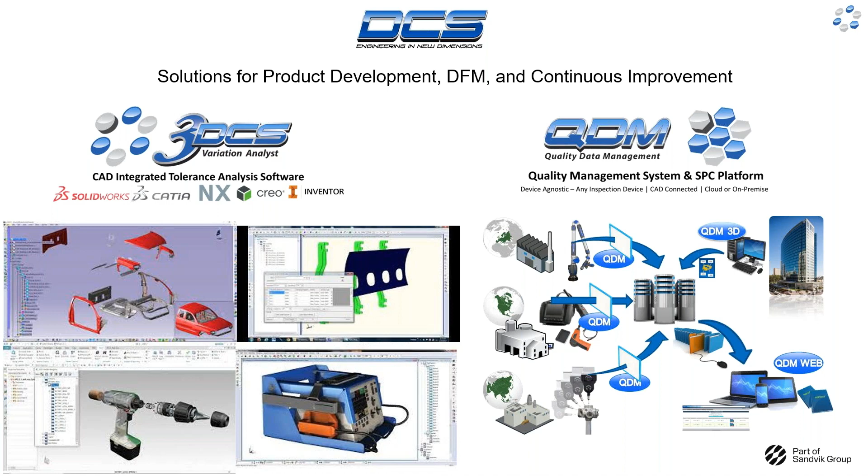We are focused on our place in Industry 4.0. The objective of Industry 4.0 is to combine existing technologies, CAD, PLM, QMS, with emerging technologies, 3DCS, for example, to make operational efficiency gains across engineering. The fundamental underpinning or digital seed of Industry 4.0 is the geometric dimensioning and tolerancing. For most companies, that currently resides on the drawing.

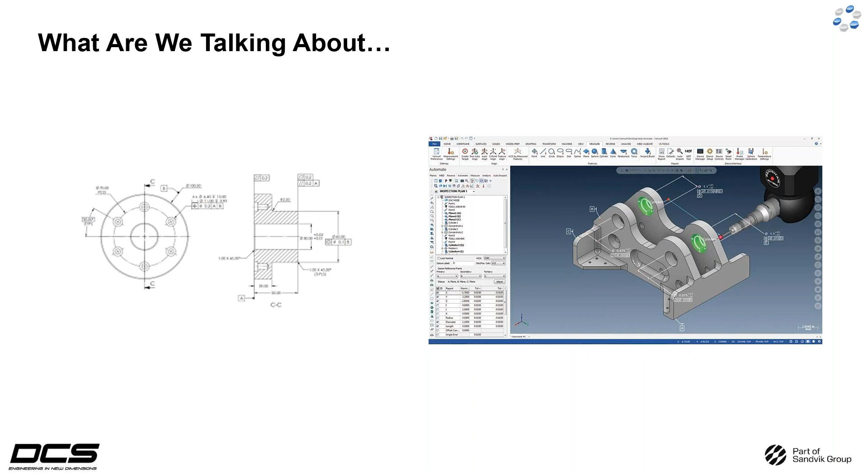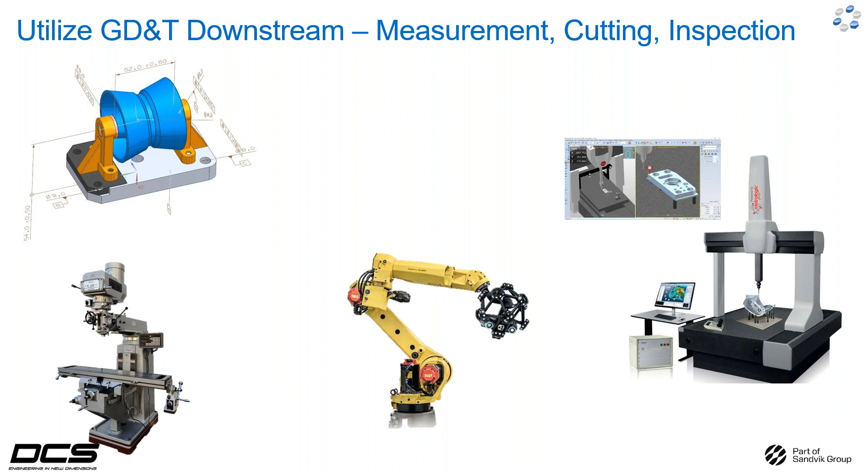But all major CAD systems now allow you to embed this 3D GD&T as a semantic feature in the CAD model. The more important element here is that now the GD&T is a machine readable and reusable file. So other elements in every manufacturing business will take advantage of it. Inspection, machining, robotics. This leads to operational efficiency gains right out of the gate.

Here's the old school, right? We design it, we've got to engineer it. We spend a lot of time, money, and effort with really smart people to get to a physical build. And we go back and forth before we get to launch so that we can validate and verify our design is going to meet quality requirements.

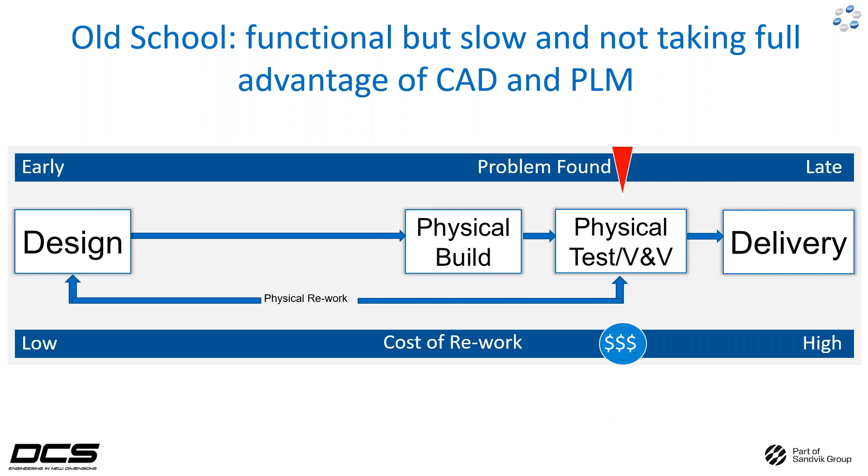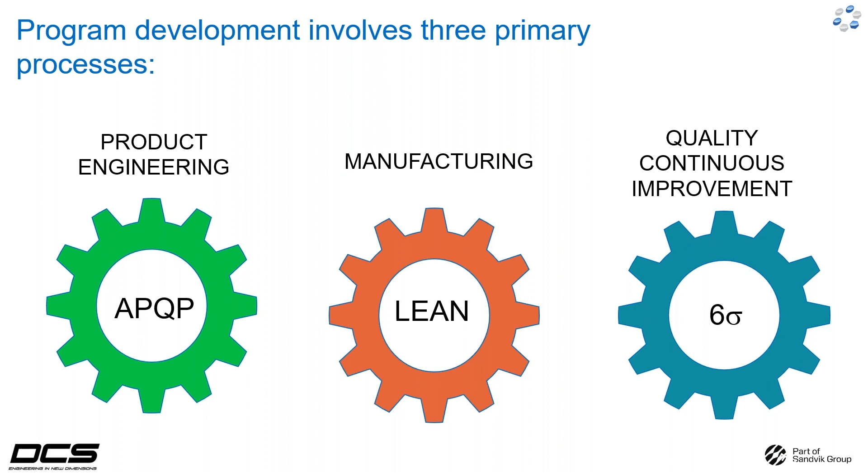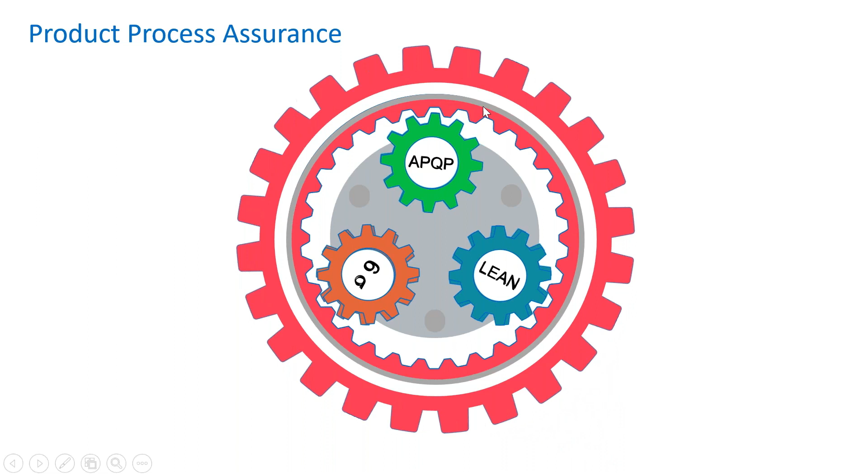And those fundamental efforts take place, but today, a little bit autonomously, a little bit separately, and the line of communication between those efforts is often slow and delayed. The program is going to go, but there can often be delay when it comes to the data that comes out of these efforts.

But now, with the Dimensional Engineer's Toolbox from your CAD desktop, you can make datum strategies digitally. You can benchmark your design before you cut any parts. You can optimize fixture locators without math data of the fixture. You can simulate multiple build scenarios. This puts you in a position to go to your launch with plan B, C, and D for the build, along with a mitigation plan should issues crop up in the launch.

We want to collect data to make decisions. Get data from suppliers. Make them validate parts before they ship. And start to thread the language of manufacturing, GD&T, through your teams. This will be the fastest way for communication across these efforts.

Now, with dimensional engineering in the middle of the effort, now those APQP, lean manufacturing, and quality teams are all in sync. And more importantly, they're all in sync with the program. When the program needs data, they can go to the system and get it today, not tomorrow after a decision needed to be made.

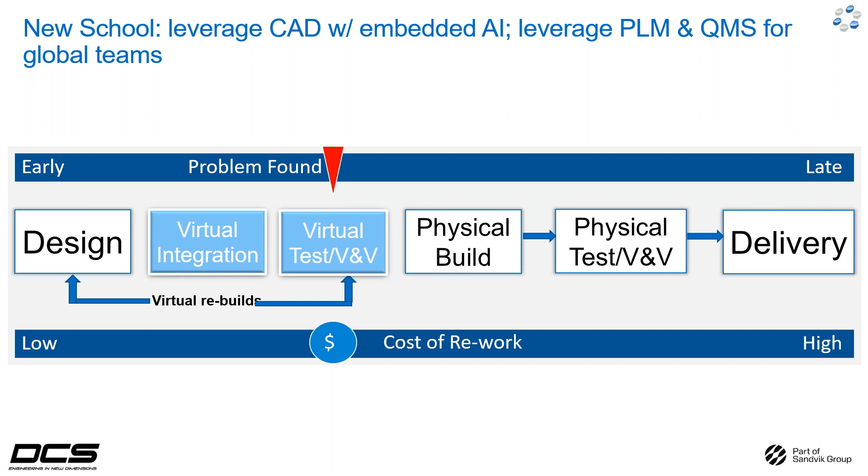The new school will have you apply artificial intelligence in its purest form at the front end. Make decisions, create machine readable GD&T that can be shared. And so now we go to the build faster than ever before. We are making engineering decisions 2 to 3 times faster than ever before. We still have to get to a build, that's obvious, but do so much faster and a lot less expensively.

Sikorsky has been building helicopters for over 90 years. For all that time, they would get to a point in the build schedule after all the engineering effort, all of the tooling, all of the design effort, supplier quality assurance. They would get to the point in the build schedule when they wanted to locate the transmission to the structure. They knew it would be 2 weeks to make the adjustments required to both install and make functional that very complex interface.

With 3DCS, Sikorsky told ASME, the American Society of Mechanical Engineers, they do all of that in 1 day. They used the saved time to make decisions on other elements of the program. That's why we like to say, simulate the build before you build. There's a lot of money to be made.

3DCS has an entire platform for dimensional engineering. Our flagship product is Variation Analyst, full-blown Monte Carlo, all kinds of distribution options, all kinds of move types. Variation Analyst is the platform to support our add-ons, advanced capabilities that allow us to use FEA data, stiffness matrices, transformation matrices, to go really deep on builds of complex assemblies.

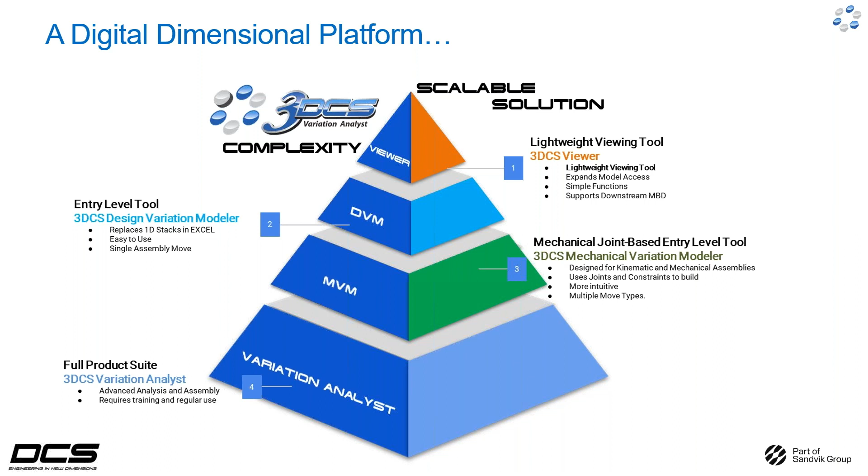We also go the other way. We also go with an entry-level tool called Design Variation Modeler. Instead of doing 1D, worst case and RSS stacks in Excel, like you might currently be doing, do 3D worst case and RSS stacks from your CAD desktop.

We asked 1,000 customers, what's the big deal? Where's the money? They told us time and again, when we do 3DCS during a digital phase of development, we reduce engineering change through the entire life cycle. When we use 3DCS to support metrology in their problem-solving requirements, we've found it to expedite that process by 50 to 60% time reduction. And we go to the launch now with multiple build scenarios and a mitigation plan. We go to the build in a proactive position, not a reactive one.

We've got to tell 3DCS what is the part, how does it locate to other parts, what is the tolerance of the part. We can use a linear dimensional tolerance. We prefer the geometric dimensioning and tolerancing. What are we measuring? I need the gap and flush to be plus or minus a millimeter. Analysis, the ability to do multiple builds extremely quickly, and then evaluation. What are the sensitivities in this design to a measurement? What is most and least sensitive to my measurement?

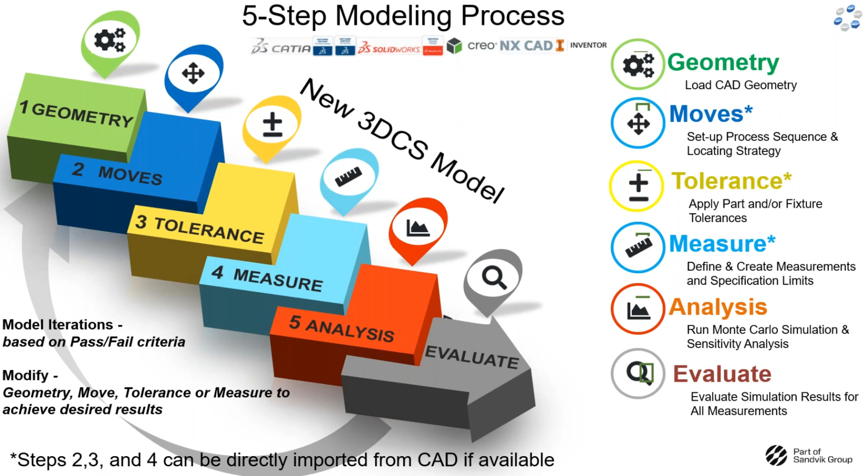And then finally, we have to define what it is we want to measure from a dimensional standpoint. Gaps, flushes, interference, circular clearances. So those measurements, anywhere you write a measurement, we will collect data and tell you whether or not you're going to be within your specification and all the tolerances that affected that measurement. So there's basically 3 main inputs: moves, tolerances, and measures. And once those are input, then you run the analysis and evaluate the results.

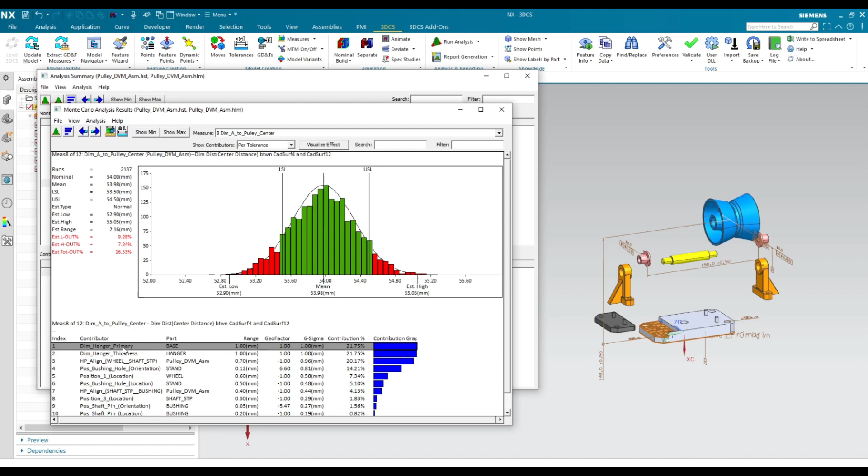If the results are out of spec, you have the option to modify tolerances, modify your location method, modify the design altogether. This is all done within the CAD system before we start actually cutting any physical parts. So the goal is to analyze your design and improve it, or at least catch as many problems as you can before you start making physical parts.

So with that, I'm going to jump over to NX. And from here, you can see I have a little pulley assembly. I'm running NX, and when our software is installed, we are just another ribbon.

So you can see there's 3DCS NX, and you can go to assemblies or PMI or any of the other NX functions. And when you do your tolerance analysis, you just come to our workbench. When you come to our workbench, there's going to be a DCS tree, which is associated with the NX tree. So you can see as I click through, it highlights the parts in the NX tree as well as in the 3DCS tree.

And then this is where all of our data will reside: moves, tolerances, and measures. This model, you can see, has embedded constraints. So we're going to utilize those to directly assemble this model. And if I take this base and open it into a new window, you can also see that these parts

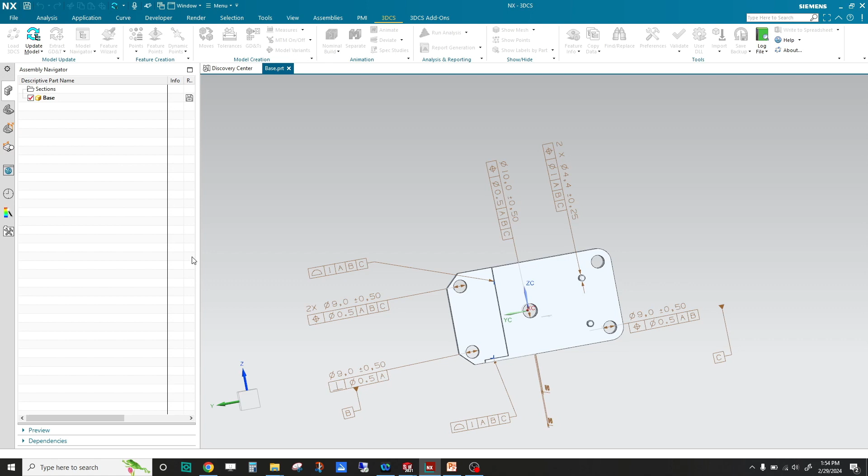have embedded PMI. So remember, you don't have to have all this stuff embedded, but the idea is that as we move more and more into model-based definition, we want as much data tied into the CAD as possible. And then what you're seeing here is assembly GD&T. So we're going to use those for our measurements.

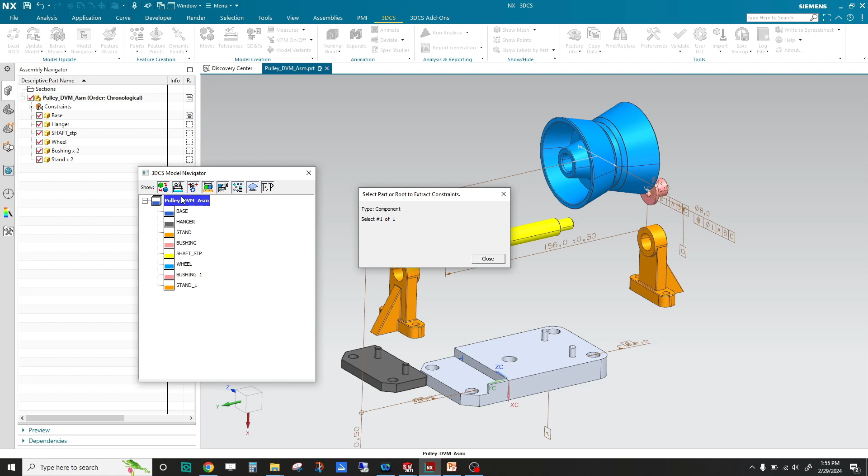So because we have all this embedded, I can come up here and say, hey, I want to extract my moves. Well, hold on a second. I gotta get my tree back. You can see how this is all empty at the moment. And if I say extract moves, parts have to be fully loaded. It created 7 moves from the 18 constraints I showed you earlier.

So if I come in here, now you can see I have these moves, and you can see how it's highlighting the features that were automatically picked up from the constraints. And now I can build this. I can separate it, and I can actually animate it through the assembly sequence, so you can see how this is put together.

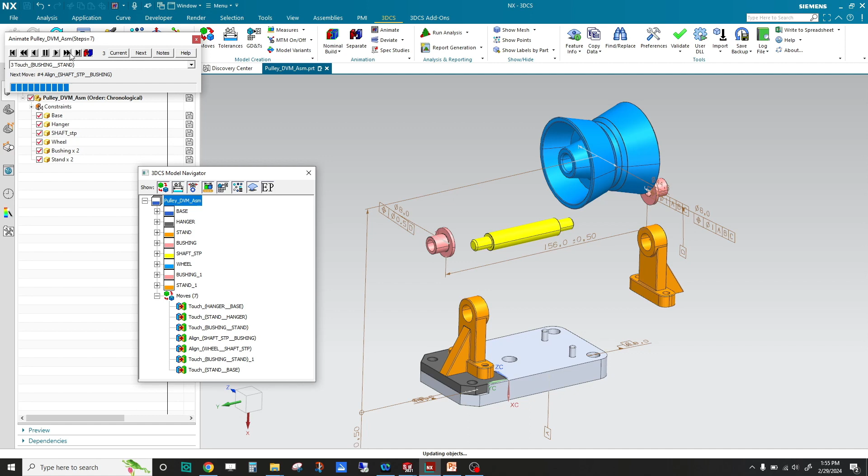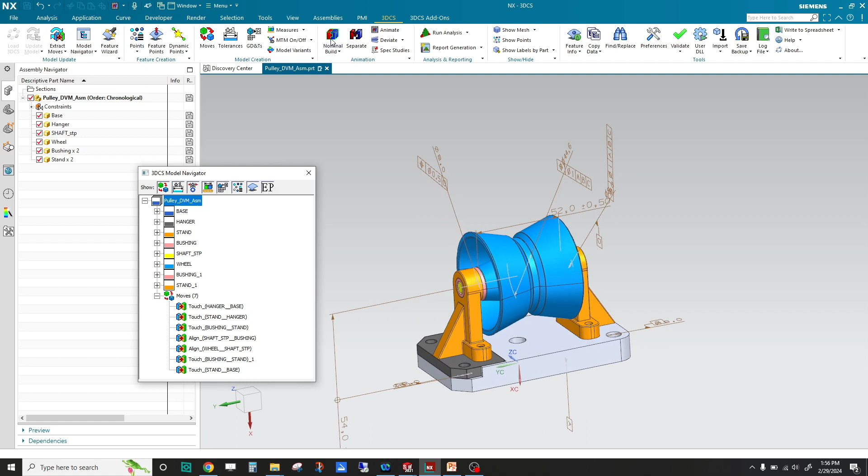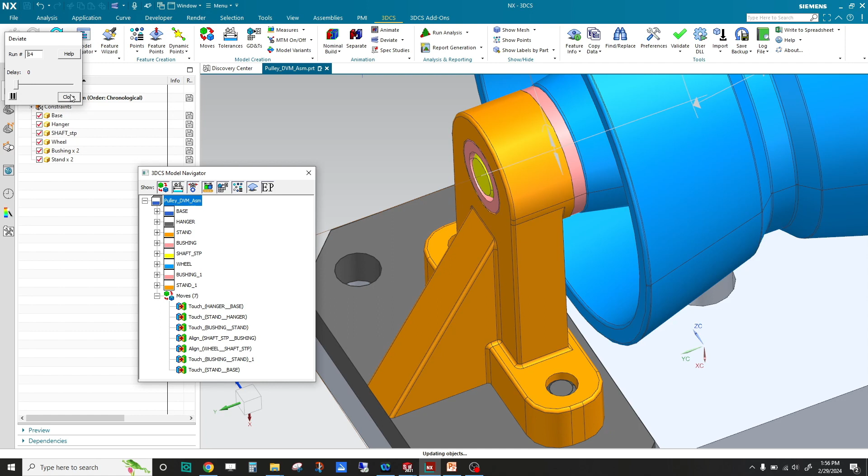Now that it's built, I have not brought in any tolerances, but from the design, if I zoom in here and I hit deviate, you can see these parts are jiggling around. This is variation picked up just from the original design because the pins are smaller than the holes. So there's inherent variation in a product just from design clearances.

Now if I separate this model and we look at the base, you can see it's got some features. These were the features that are used in the moves, but there's no tolerances. So now I'm going to come up here and extract GD&T on all the parts. And you can see it pulled in 17 GD&T callouts. So now you can see from the tree, we have all kinds of GD&T.

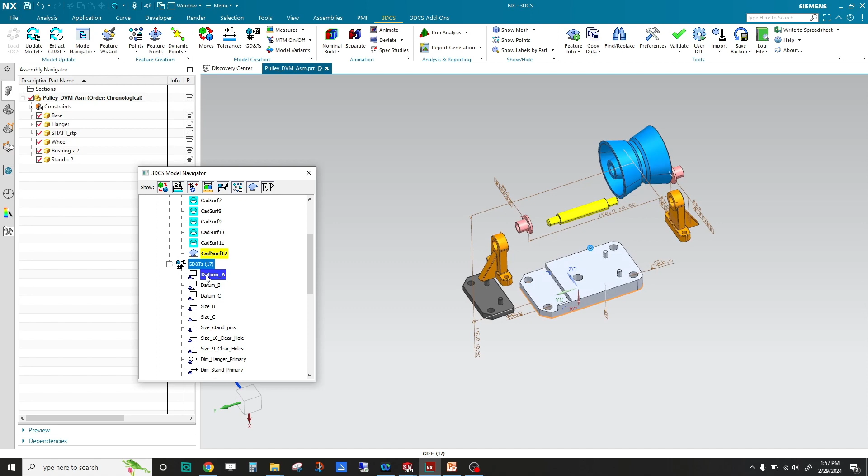I'm going to double click this. I'll do a quick auto sort so I can mouse over, and you can see on this base it's highlighting that's datum A, that hole is datum B, datum C, and if I come down here, profile tolerance on that surface, profile tolerance on this surface, and so forth. So all the parts are now toleranced.

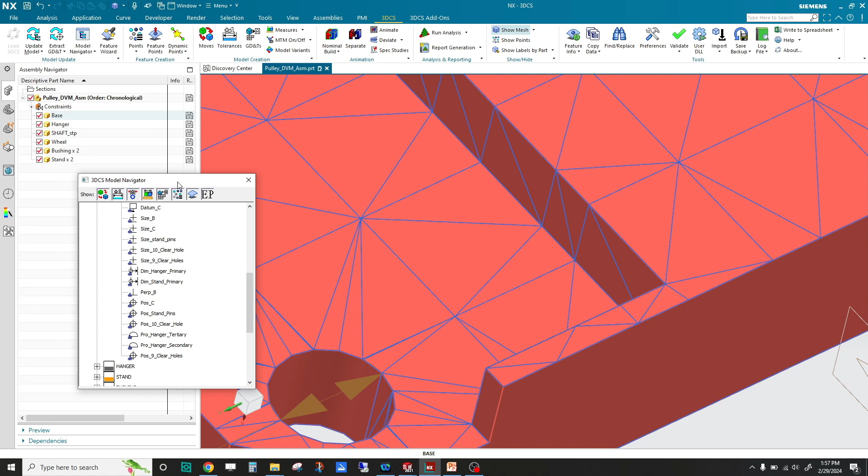If I turn the mesh on, we don't deviate the physical part, so any feature that is used for a move, tolerance or a measure, we will create a mesh on it. So now if I come in here and I say sweep, you can see these surfaces are varying within their tolerance zone. So now my parts are toleranced and I have my moves defined.

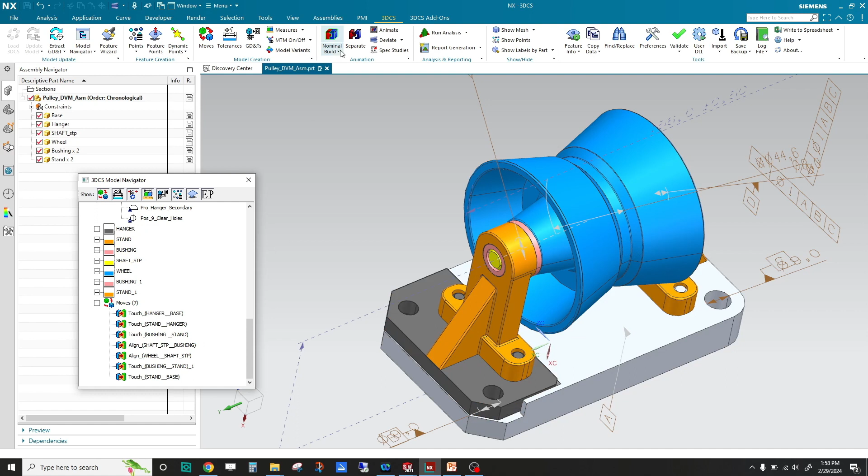So if I build it now and hit deviate, you can see it's moving much more because now it's picking up the clearances plus the part tolerances. So now if you look, we have tolerances on our parts, we have move definition. Last thing we need is our measurements.

So I'm going to come up here and say extract measures. And I'll pick this here. And it says that it created 9 measurements. We're going to look at only 2 measurements. But I'm also going to come up here and extract GD&T measures. That would be like this position tolerance here.

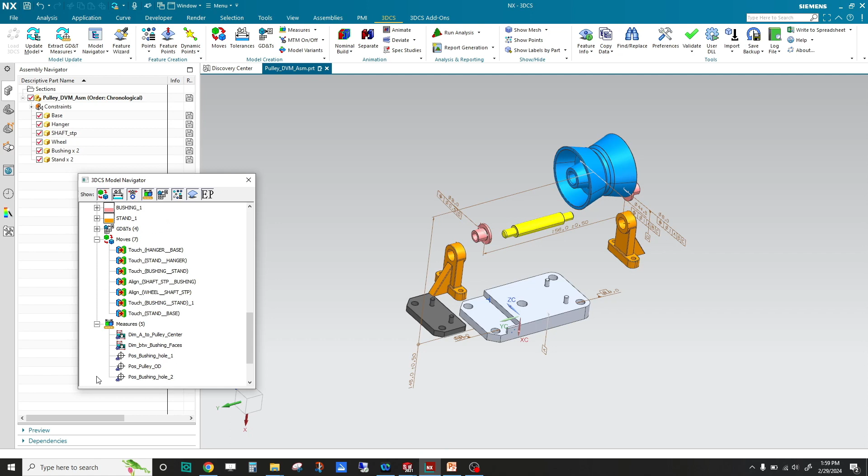So that created 3 measurements. So now if I come down here at the final assembly, you can see that's my dimension distance measure, which is this 146 plus or minus 0.5, which is from the attachment of the bottom of the base to the center of the pulley. If I do a nominal build, you can see that updates to 54 plus or minus 0.5. If I go into this measurement, there's the 54, and this is the spec limit that it pulled from here.

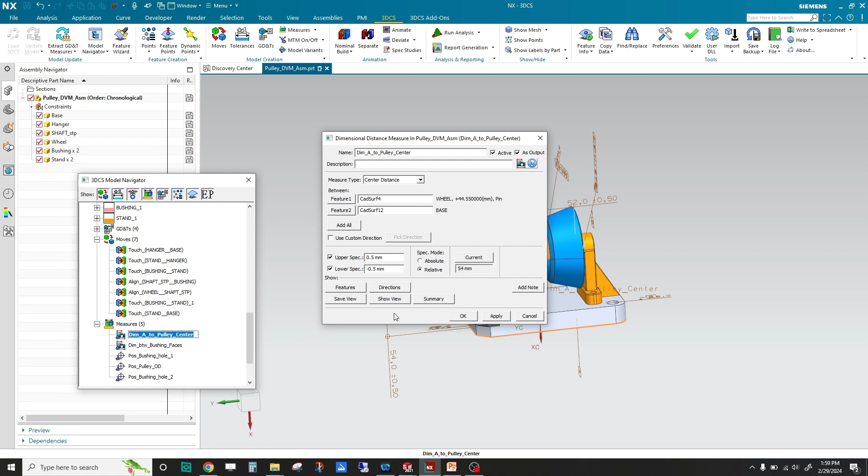So this is not a tolerance. This is actually a final build requirement that we're testing for. If I deviate from here, I can click on this current, and you can see that number is changing for every build. So then our goal is to understand, with our piece part tolerances and our assembly method, can we meet that 54 plus or minus 0.5? So then we're going to continue on and run an analysis.

Give me 1 second. Okay.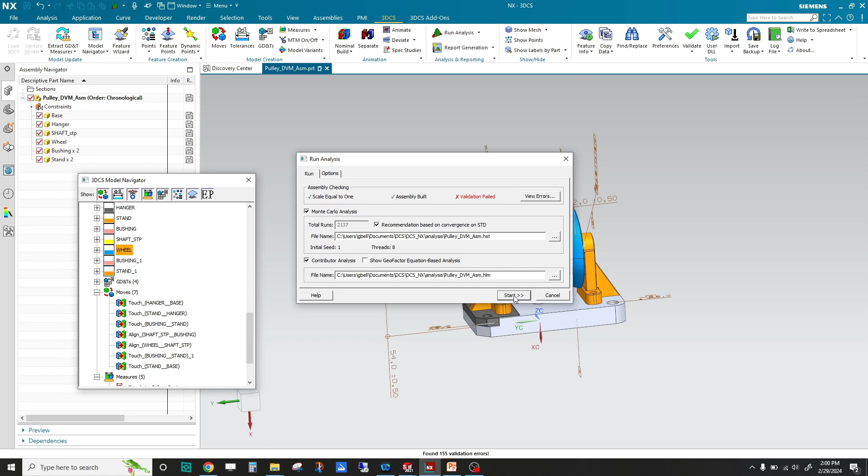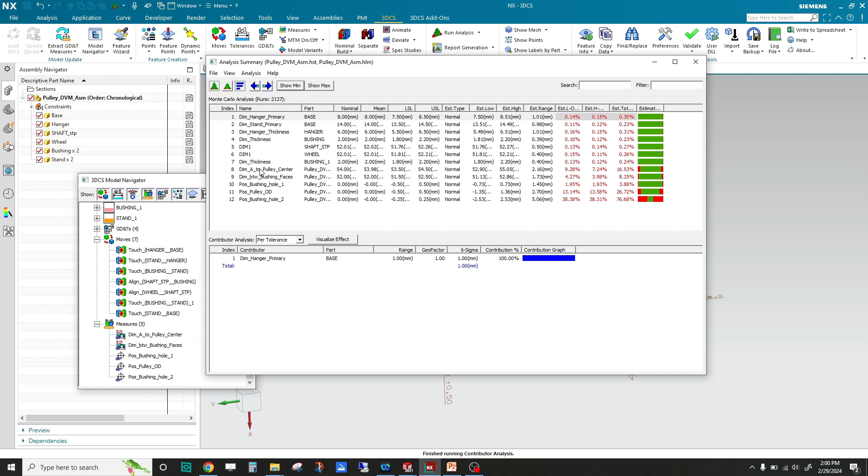So now you can see this is going to list all the measurements in the model. It's giving you a summary page. And if we come down to, we want to look at this measurement here, dimension A to pulley center. You can see it highlights it on the graphics, dimension A to pulley center, and it's telling you your measurement, where your measurement's located, your nominal, your mean, and your spec limit, and your estimated range of variation.

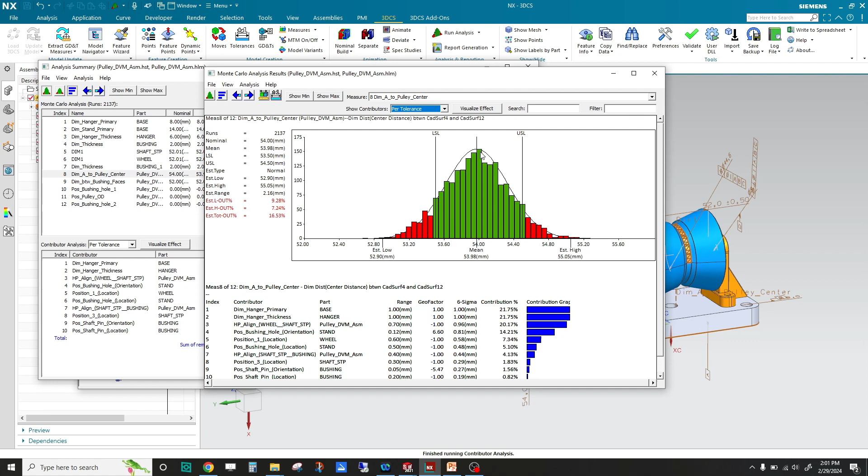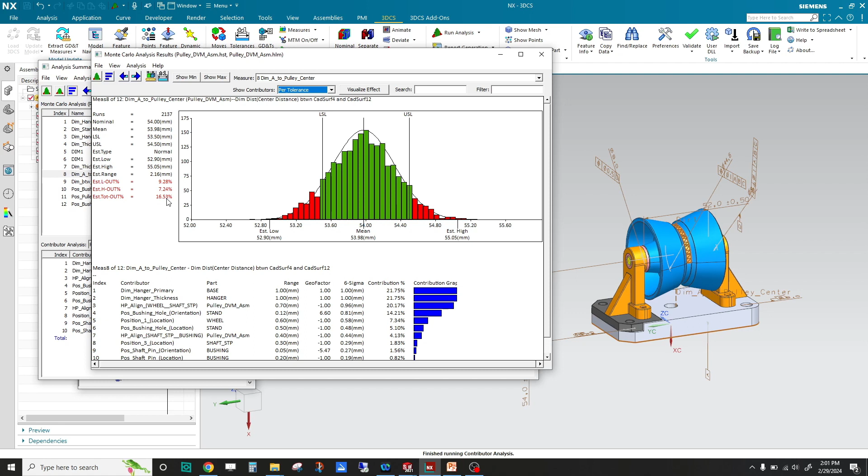If I double click this, you can get your histogram here and your list of contributors down here. So this is telling us that, hey, we're not going to meet our goal of 54 plus or minus 0.5. Here's the spec limit at 53.5 and 54.5. And we're going to fail 16.53% of the time. Then, if I separate this model, I can click on here and it will walk you through all the tolerances that affected that gap or that distance measurement.

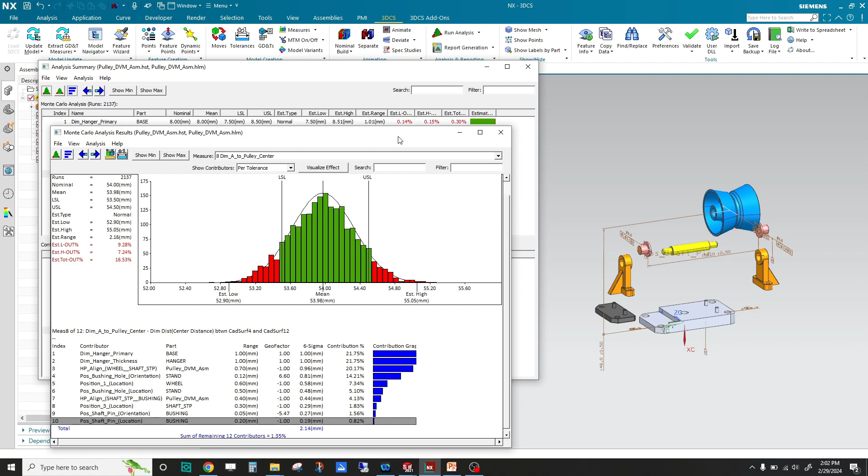So from here, you know what is your most critical tolerance, and you know what is your least critical tolerance, and you know if any of your tolerances are amplifying. You can see this tolerance here, it's a very tiny tolerance, but it's being amplified based on how these components are locating. And so with this data, you can now start validating your design, modifying your design, tuning up your tolerances. Once you have all this data, you can go ahead and build it.

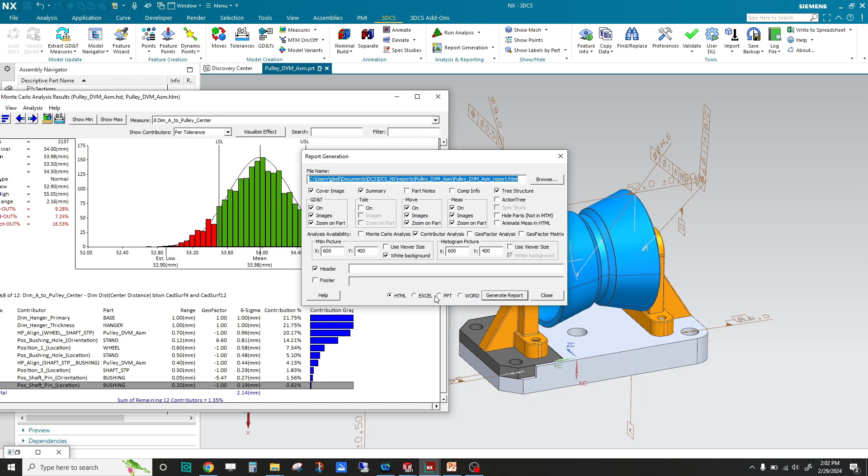And then you can come over here and you can say generate a report. From here, you can choose what you want in your report, and you can choose if you want it to be HTML, Excel, PowerPoint, or Word. So I have pre-run that report, which you get right here. And so you can see, this is a cover page, took a picture of your model, pulley assembly created by me. You got a model summary.

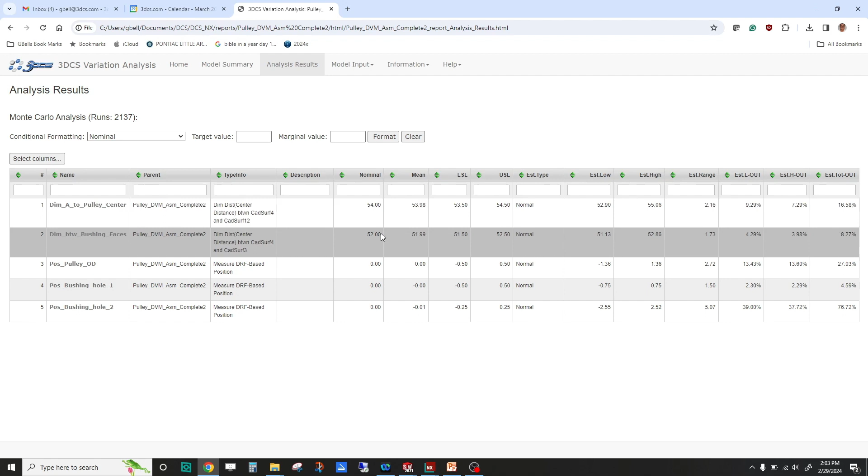This is our default summary that you can fill in to define your objectives and your summary and your critical measurements. And when you get to your analysis results, again, you get your data in a spreadsheet format. And if I mouse over, you can see it took a picture of your measurement. And if I click on it, you get a better view. So we're measuring from here to the center of the pulley, and you get your histogram with your data across the top. And we even took a picture. If I hit animate, you can see we took a picture of that pulley at its min and max position.

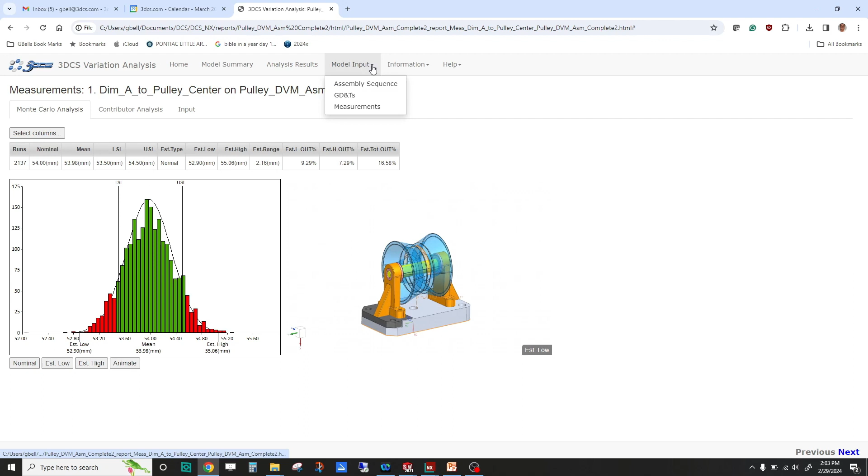And then if I come over here to model input, I can walk through the assembly sequence, and you can see it took those moves and it took a picture to walk you through how this is actually built. If I go into my GD&T, you can see we got pictures of datum A, datum B, datum C. If I scroll down to, there's a lot of GD&T on the base.

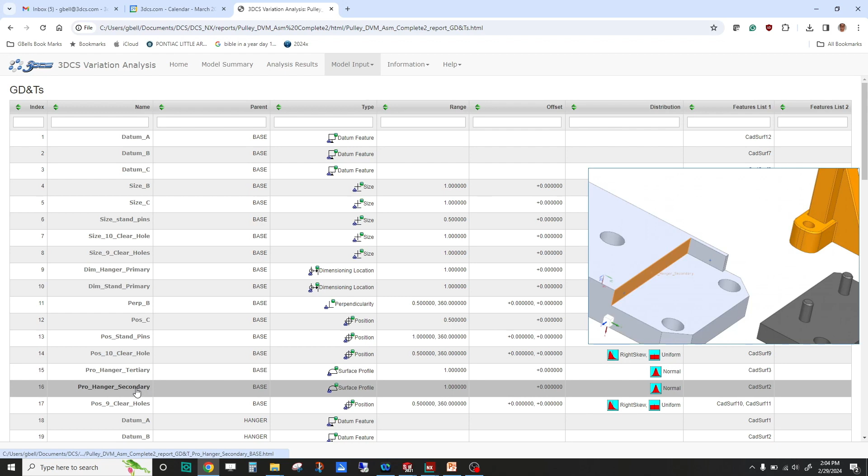If I come down here to a profile on that surface, so now you can see, all the information in the model can be dumped out into a report, Excel, PowerPoint, Word, or HTML, or you can just dump out the results if that's what you want. And obviously you can see I'm no longer inside the CAD system. I'm reviewing this model in my Google Chrome.

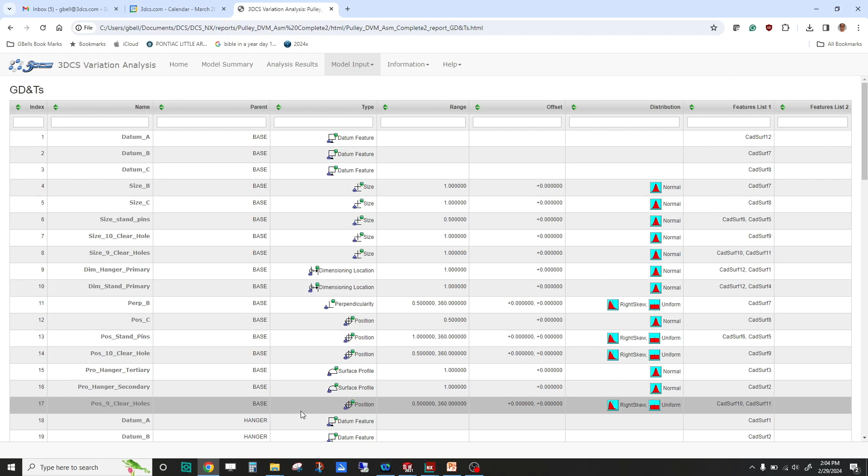So that's the basics. Open up your model, define moves, tolerances, and measures, run your analysis, create a report.